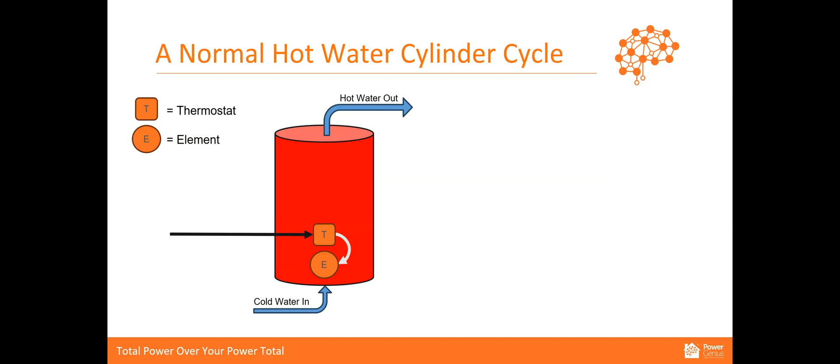Now, what happens if you use a whole lot of hot water? You might use 2 showers and a bath, and the element will turn on and it will start reheating immediately, and it will recirculate the hot water because hot water rises. It circulates that hot water through the cold body of water, and then eventually that all comes back. But again, you're buying the energy to reheat that water from the grid.

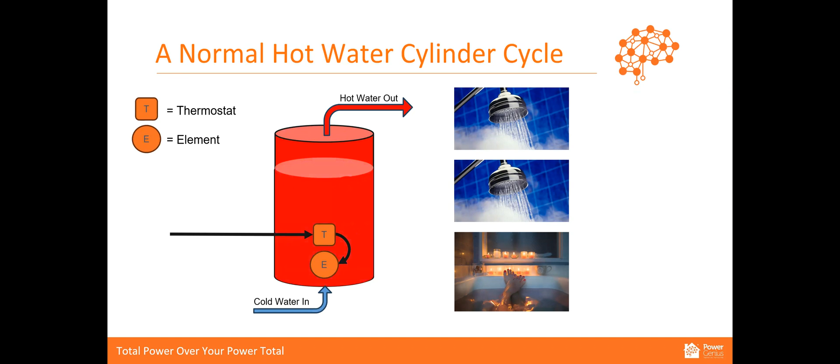So with the PowerGenius, if you install a PowerGenius system, we will put a controller at the hot water cylinder, and we'll also put a temperature sensor higher up the cylinder, maybe 3/4 of the way up or maybe halfway up, depending on a few variables. But that will then take control of the power to the cylinder. Instead of the thermostat controlling the cylinder, now the PowerGenius is controlling the cylinder.

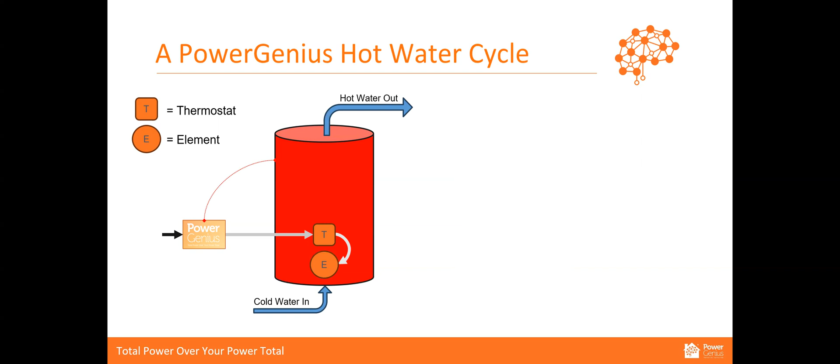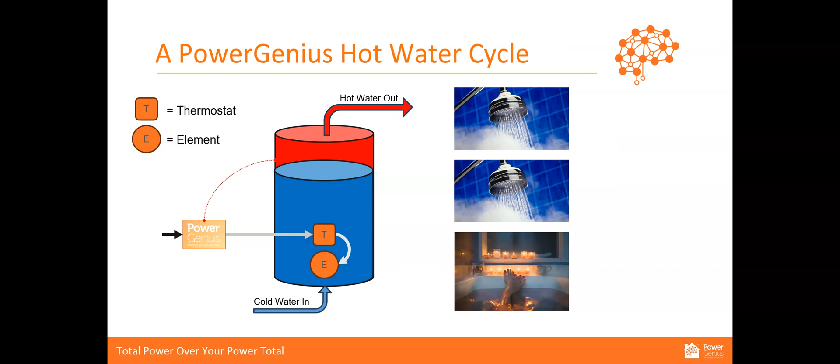So what that means is you can have a whole lot of hot water usage, and the thermostat might turn on and try and make the hot water turn on, but there's no power to the thermostat. And the PowerGenius sees that there is still enough hot water for you to use in the house, so it won't turn that thermostat on. So what it does is it then waits until the next day, and it will sense when there's excess solar energy being produced by your solar panels.

And at that point, it will gradually turn the hot water cylinder on a bit like a light dimmer, and it will slowly reheat that cold body of water at the bottom of the cylinder with all that solar energy that you would have otherwise exported to the grid. Now, export to the grid is cheap. They don't pay you much, and buying it from the grid is expensive. So it's way better to use your own solar power and reheat your water that way than it is to buy it from the grid. So that's what the PowerGenius does every single day.

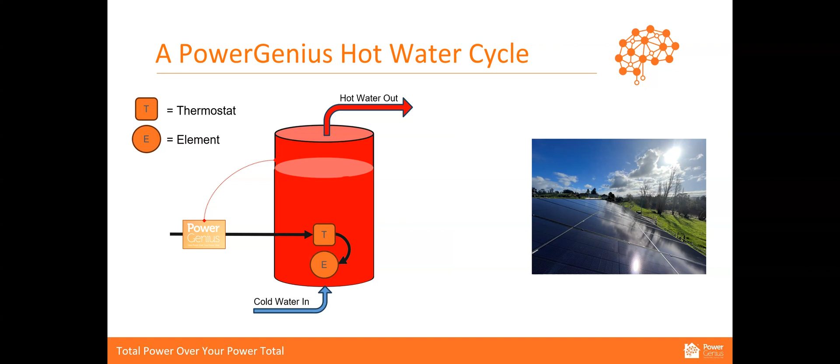It allows the bottom of the cylinder to stay cold, and then it'll only reheat from the grid in situations where the cold water gets above that temperature sensor level. So let's start on the left from late afternoon, assuming that the cylinder has been completely heated and is nice and hot, and then the sun's going down, so there's no more solar power available. We're at the late afternoon, and you use a little bit of hot water.

And then we go into the evening usage, and maybe the evening usage causes the cold water to come above the temperature sensor of the PowerGenius. Then overnight, that PowerGenius will top up that cold body of water to around about 50, maybe 55 degrees, just enough so that you've got enough hot water to see you through the morning routine if there's a lot of usage. It may also leave that cold body of water cold if that doesn't reach the temperature sensor.

So in the morning, you're going to use a little bit more hot water, you're going to use a little bit more cold water. And so what happens there is in the morning, more cold water comes in the bottom, and that displaces that warm water section, the 55-degree water, pushes further up the cylinder. You may or may not have a little bit of hot water left, but then when the sun comes out and your solar starts producing excess power, all of that cold and warm water in the cylinder is then reheated right back up to toasty hot, ready for another set of usage in the evening.

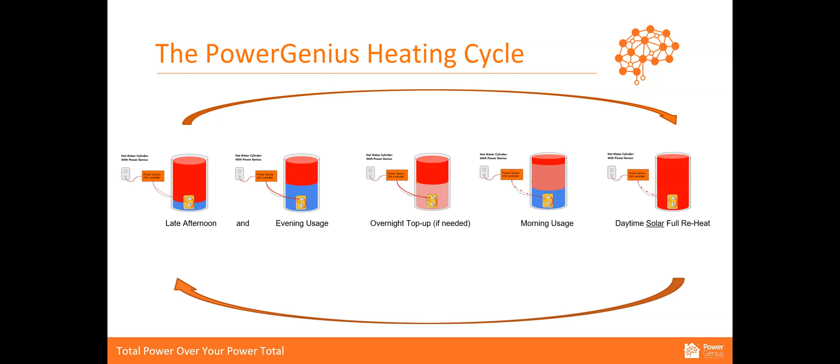So how does it actually look? So this is a cylinder that has a PowerGenius system retrofitted to it. So you don't need to buy a new cylinder. You just buy the PowerGenius box and a monitor at the switchboard and a little device that plugs into your internet router. And all of those devices communicate together.

And you can see there halfway up this cylinder, there is a temperature sensor that's been installed. Now, this is professionally installed. These installations have been happening for decades in hot water cylinders. Back in the old days, they started out installing this type of sensor with hot water thermal systems where you had water actually going through the panels in the roof, and they would install a sensor halfway up the cylinder for exactly the same reason.

So this is not new technology. That particular sensor being installed is not new technology. It's not dangerous to install that, and it does not void the warranty of a cylinder.

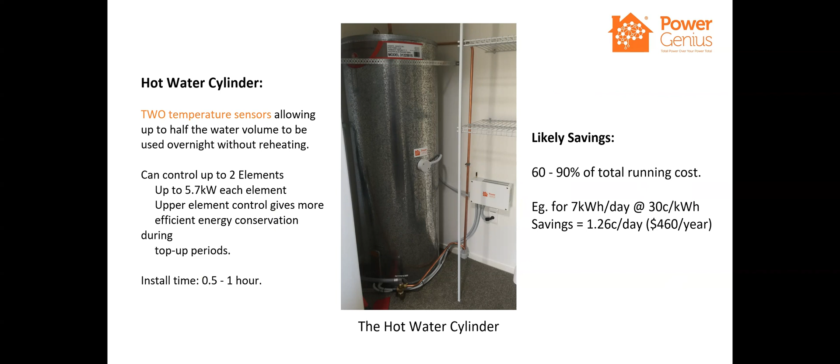So you will then be able to save quite a bit of money each year, depending on the size of your cylinder. And how much you're going to save also depends on how big your solar is, how much load you use in the home, and how much hot water usage there is, combined with how big the cylinder is. So it's very difficult to predict exactly how much you're going to save, but the reality is you're definitely going to save a lot of power being purchased from the grid with the PowerGenius system, because it will prefer to use the power from your solar panels, and it will only top up from the grid if absolutely needed, so you don't get a cold shower.

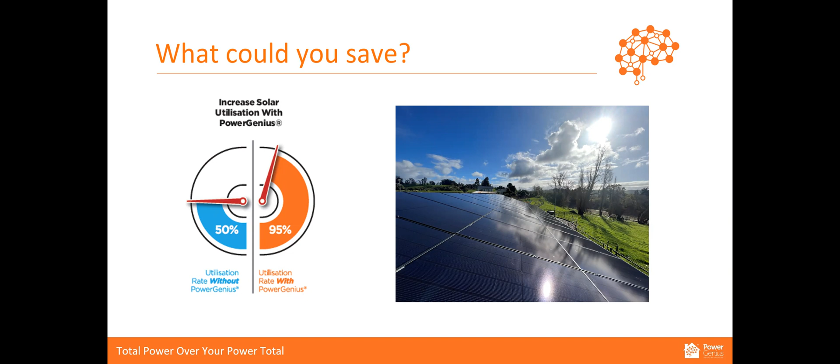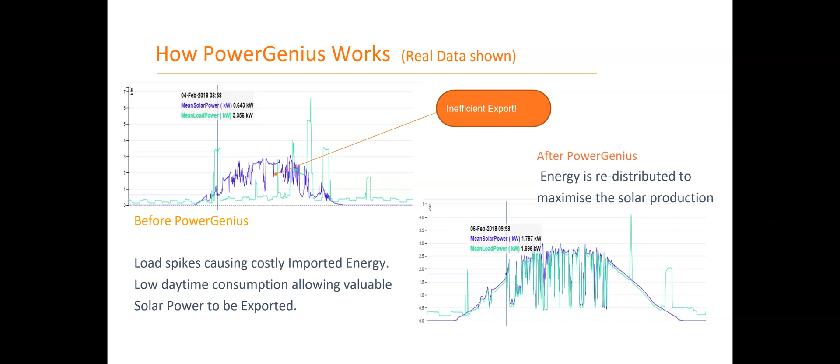On the bottom right graph, you can see after the PowerGenius hot water system controller had been activated and turned on, they exported very little to the grid, and the green load was following the blue line, the solar production, almost exactly for pretty much the whole day. And that's with a hot water cylinder being controlled by the PowerGenius system.

You get a dashboard so you can actually see what's going on. It is a bit technical, but you get used to it. And you can see what's happening with your hot water system, and you can also see what's happening with the power. What solar is being produced? What are you importing? What are you exporting? And what the load is in the home.

So you can see there on that particular power graph that they are exporting a lot of energy to the grid. That's because the hot water cylinder has switched off in that particular situation. You can see it's 4:30. The hot water cylinder has already reached around about 60 degrees and it's turned off. And that's the thermostat inside the hot water cylinder, which we leave in place. And that turns the hot water off when it gets up to the level that the manufacturer recommends is safe for the cylinder.

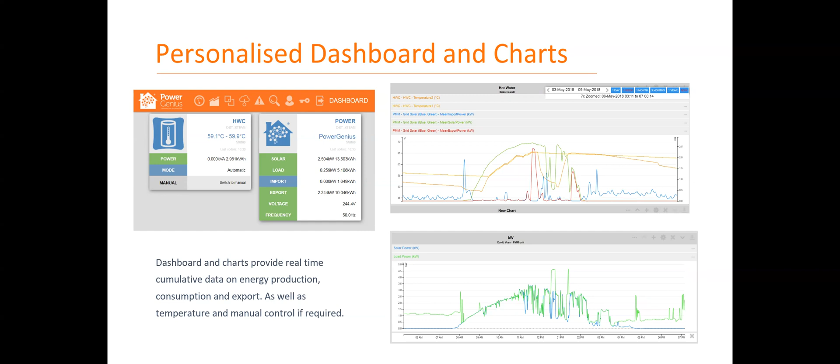But you can see there the charts. You can see the temperature of the hot water. You can see the grid import and the export. You can see a lot of information if you want to. The other thing with the PowerGenius is that you can call us or email us and we can interpret that data for you, or we can change settings to make it work better for you.